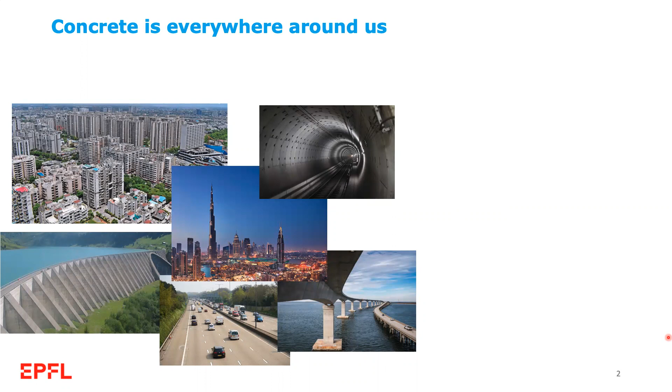Concrete is everywhere around us. We use it to build our houses and infrastructure, in dams to obtain energy, but it's also part of our sustainable development strategies. We will continue to require massive amounts of concrete to materialize these new technologies.

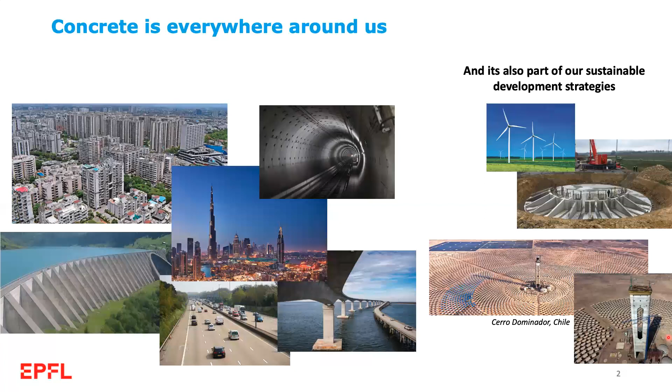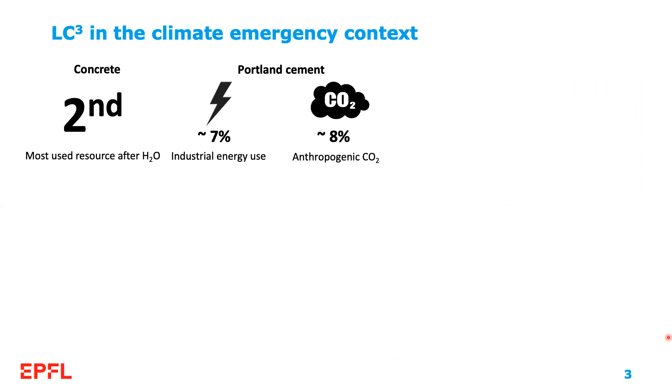Concrete is therefore the second most used resource after water by humanity. The Portland cement that we need to make this concrete is accountable for about 7% of industrial energy use and about 8% of anthropogenic CO2 emissions.

The best estimates we have only forecast that this demand for cement will continue to increase in the next two decades, particularly in regions facing development such as India, Africa, and Latin America.

LC3 is a blended cement that combines clinker, calcined clay, limestone, and gypsum. It allows us to reduce the clinker factor of this blended cement to 50%, saving 30 to 40% CO2 compared to PC, and offering equivalent performance to PC in terms of strength and enhanced durability in some exposure conditions.

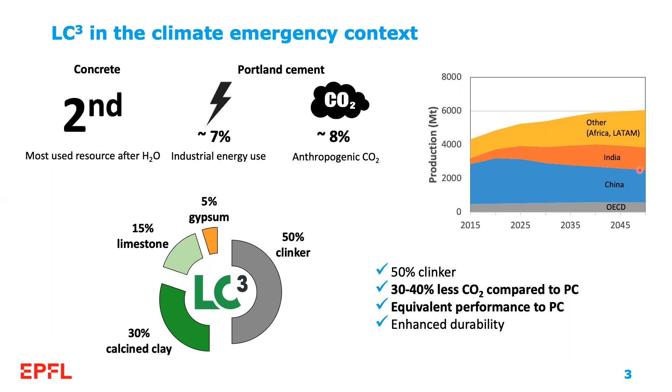Why is it important to consider calcined clay and limestone as supplementary cementitious material? The main reason is that these materials are the only ones available in the quantities we need for a widespread reduction of the clinker factor.

Particularly here, I want to analyze the case of slag and fly ash, which are two materials widely used to blend cements. In the case of slag, the stock that we have worldwide is about 8% of cement production, and it's actually decreasing as we recycle more steel rather than producing from iron ore.

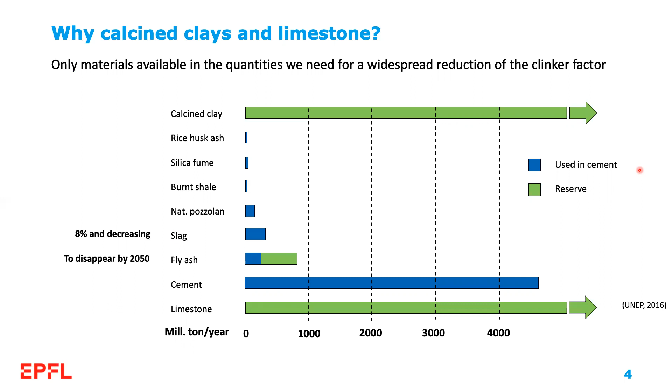And in the case of fly ash, as we shut down our coal power plants, it's expected that this material will disappear by 2050.

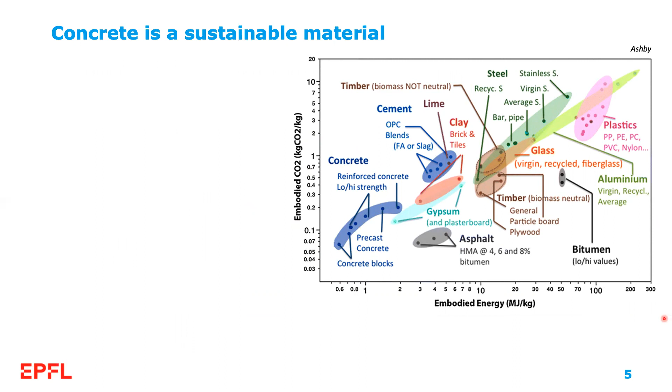Concrete is a sustainable material. When we compare concrete with other construction materials, we can actually see that the embodied energy and the embodied CO2 is much lower. So then where is this high environmental footprint coming from?

It's because we use a lot of it, and we will continue to need a lot of concrete to continue developing our society. Despite the relative low environmental impact of concrete compared to other materials, we still have significant space for improving, and this is what I want to show in this presentation.

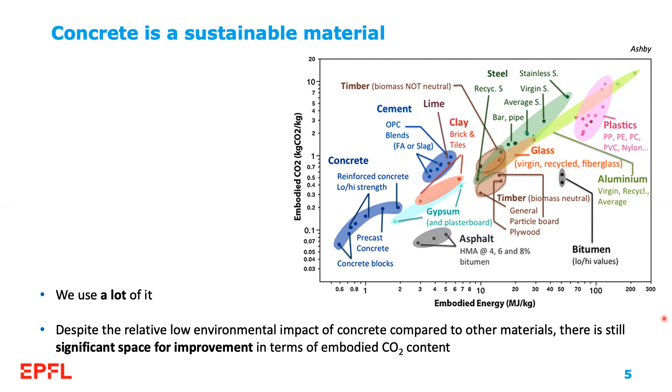What are the strategies that we can focus our scientific and practical development on in order to achieve a lower CO2 material for our future development?

The CO2 of concrete is coming mainly from the cement that is used as a binder to connect the aggregates in the material. Approximately 850 kilograms of CO2 are produced per ton of clinker that are emitted.

In this sense, the best strategy, and this is the focus of most research on sustainable Portland cement in the last decades, is to reduce the amount of clinker by incorporating what we call SCMs, or supplementary cementitious material. In short, we need to use blended cements.

But, and I want to be very clear, the construction material is concrete, not cement. And it's very important here that at the end of the day, we need to think in terms of total binder content, which is cement plus SCMs per cubic meter of concrete.

This is a multi-factor problem because this quantity depends on a lot of other requirements such as slump, maximum aggregate size, the aggregate grading used, the choice of water to cementitious material ratio depending on strength and durability requirements, and the use or not of chemical admixtures. So at the end of the day, this is a multi-factor problem.

And in this regard, the performance of our blended cements is key, as I will illustrate in the next slides of the presentation.

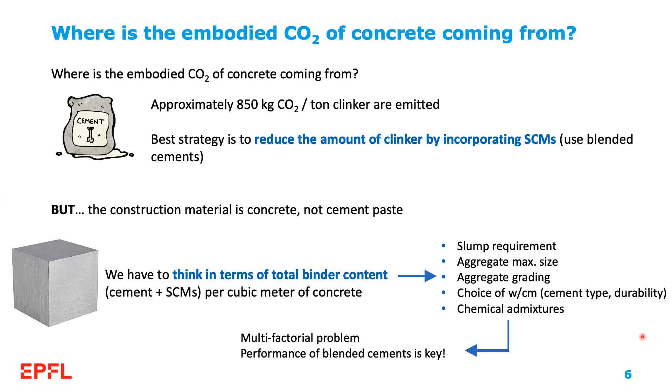LC3 is a good cement for the future. It offers equivalent performance to Portland cement. And this is very important because in this case, we do not need to decrease the water to cementitious materials ratio compared to PC in order to obtain a certain strength in our concrete.

This allows me to keep the binder content per cubic meter of concrete low, or as low as I would use in a Portland cement scenario. This allows me to save 40% of CO2 compared to PC, and I have enhanced durability properties against chloride, sulfate attack, and ASR.

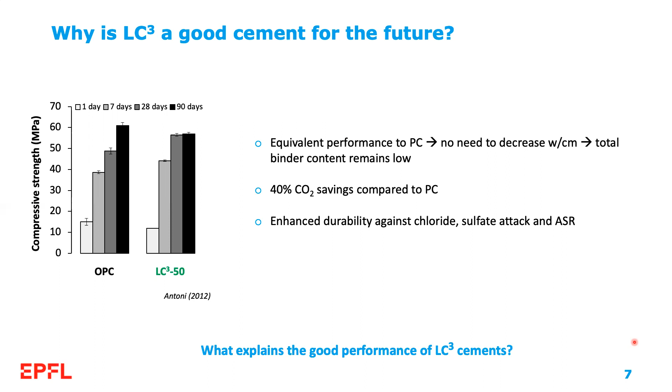What explains the good performance of LC3 cements? What makes LC3 so special that I can reduce the clinker content 50% and still retain the same properties as PC in terms of strength, and even improve some of these properties in terms of durability?

During my doctoral process, I explored different aspects of LC3 technology, from the clay quarry to production of the blend and characterization of its properties at early and long-term ages. In particular, I conducted studies on the effect of calcite and pyrite impurities on the reactivity of the calcined clay, the use of particle classification techniques during grinding to increase the kaolinite content of low-grade clays, the application of grinding aids, particularly alkanolamines on LC3, in order to improve the grinding process and develop strength over time by interaction with the aluminate phases. The sulfate balance of blended cements, and particularly LC3, is something that I study in detail and that I will talk about in depth during this presentation.

What makes LC3 so special is the precipitation of carboaluminates by the interaction between limestone and calcined clay. And finally, the long-term behavior of LC3, and how these reactions continue over time to provide consistent strength and durability of the material.

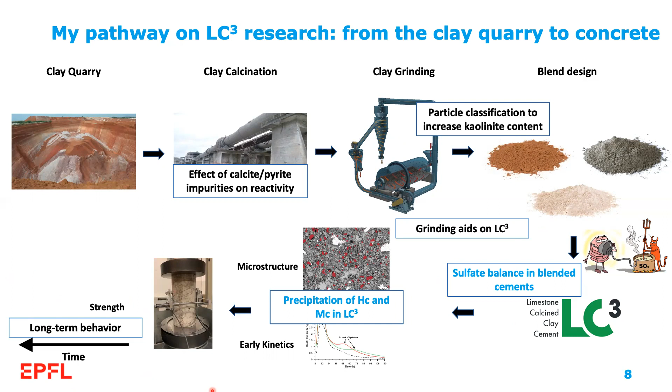We need to understand that the hydration process of a cement is a compilation of chemical reactions taking place one after the other or simultaneously, and these hydration reactions translate into microstructural densification, what we call space filling. It's really this space filling, this microstructural densification, that provides strength and durability.

In this presentation, I will focus my attention on the second hydration peak linked to ettringite precipitation and the third hydration peak, which is associated with the precipitation of carboaluminates.

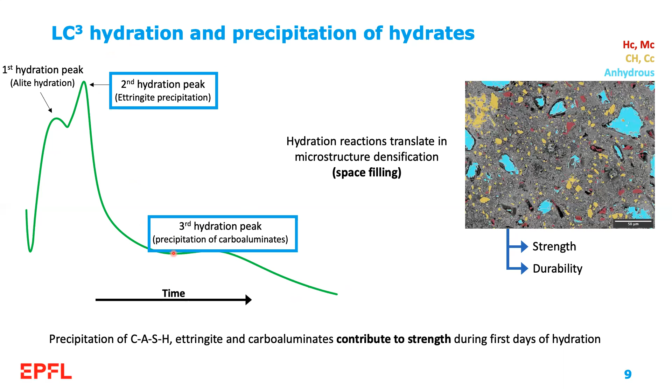I want to move now to talk a little bit more on the work that we have done at EPFL on sulfate balance and carboaluminate precipitation of LC3 cement, and how important it is to understand the underlying mechanisms to optimize the performance of these blended cements.

Fortunately, there is an easy solution for this, and we have known this for more than 100 years. We can add gypsum or another sulfate source to the system in order to retard this aluminate reaction. In this case, the silicate or alite peak takes place first, and the aluminate peak follows. The silicate peak recovers its normal development, and the aluminate peak takes place after depletion of solid gypsum in the system, in what we call a properly sulfated system.

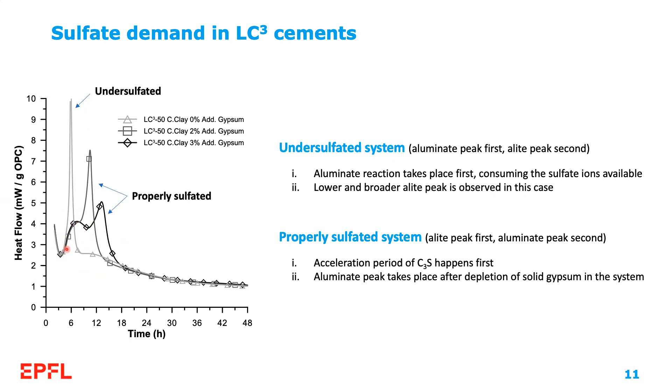But why does LC3 have a higher sulfate demand compared to PC? Why do we need to add more gypsum to LC3 compared to a normal PC, even accounting for the dilution effect of the clinker factor reduction? For a long time, we believed that it was the alumina introduced by the addition of metakaolin, an amorphous aluminosilicate, into the system.

The difference between the two clays is that the lowest grade clay, meaning lower metakaolin content, has a higher specific surface area compared to the higher metakaolin content system. We can see that by the increased enhancement of the alite peak in the case of the 50% metakaolin system.

So it appears that the acceleration of the aluminate reaction is more related to the filler effect contribution of the calcined clay rather than the alumina contribution of the material.

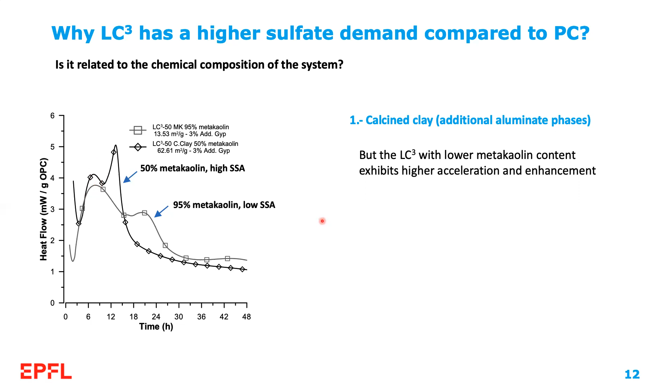So in this case, we were able to confirm that the contribution of the surface of the SCMs, through what we call the filler effect, explains the higher sulfate demand or increased sulfate demand of LC3 and in general of any blended cement. But the question is then how the filler effect is linked to gypsum depletion, because filler effect is something we normally relate to alite reaction enhancement, and this is a separate chemical reaction involving alumina.

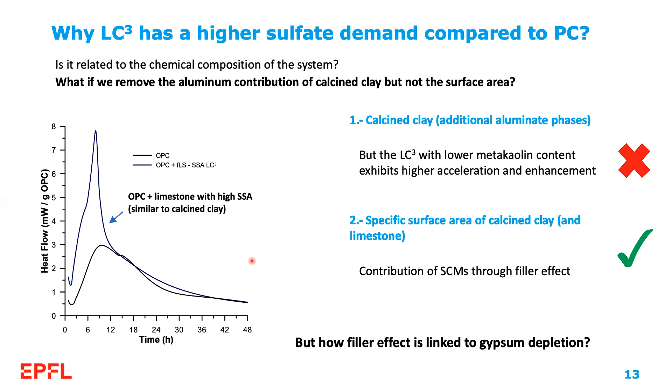And the answer to that is CSH. CSH, as we know, is the main reaction product of the hydration of cement, and it's well known that it can adsorb and incorporate different ions during the hydration process, particularly sulfate, as we are concerned here, but it can also incorporate things such as alumina, alkalis, and chloride.

We can see here from previous work in our lab that the amount of sulfate in the CSH is very high before the aluminate peak, and then it decreases as the aluminate reaction restarts after depletion of solid gypsum in the system. So basically what this shows us is that sulfate is adsorbed on CSH and then is desorbed at gypsum depletion.

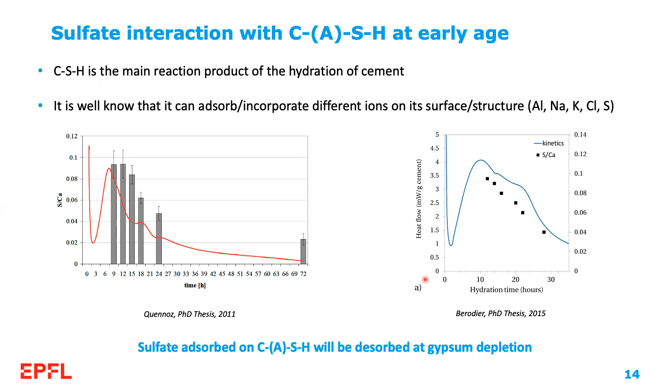This allows us to formulate our mechanism of sulfate balance of LC3 and in general of any cementitious material. We can divide this in two stages. During the first stage, sulfate gets adsorbed in CSH surface.

And it's very important here to realize that if the rate of CSH precipitation is increased, sulfate adsorption will also increase. In this regard, finer material, such as finer clinker, for example, hydrates quicker, consuming more sulfate per unit time. So this cement will have higher sulfate demand.

And the addition of more nucleation surface, what we call fillers, which is basically what supplementary cementitious materials are doing, will affect the CSH precipitation rate and therefore the sulfate balance. But this contribution is in general independent of the chemical composition, as long as the chemical composition is not significantly affecting the filler capacity of the material. In particular, this is not directly related to the alumina content of my material.

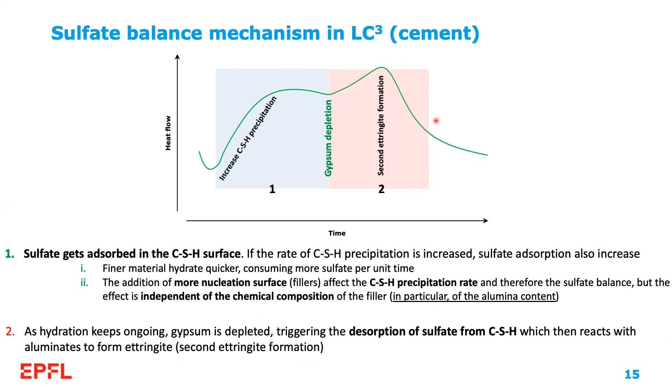In the second stage, as hydration keeps going, gypsum is depleted from the system, triggering the desorption of sulfate from CSH, which then reacts with the aluminates to form ettringite during the second ettringite formation, which we associate with our aluminate peak.

Let's move now to precipitation of carboaluminates in LC3, and why this enhanced formation of carboaluminate is so special, and makes LC3 such a special blended cement for our sustainable concrete endeavor.

So summarizing what we know now, we have three main peaks that we can clearly identify during LC3 early hydration. A first alite peak associated with dissolution of C3S, leading to precipitation of CSH. A second aluminate peak associated with the fast dissolution of C3A, leading to the second precipitation of ettringite, as we discussed in the previous slide.

And we have this third peak of hydration. We wanted to understand which reaction was associated with this third peak of hydration, which appears enhanced in LC3 compared to what we see in Portland cement. For this, we analyzed the different reactions happening in LC3 that involve metakaolin.

So the first one that we see here is the classical pozzolanic reaction, if you want, where metakaolin reacts with portlandite and water to form CASH. In addition, it's well known that limestone or calcium carbonate can react with alumina from clinker.

With the alumina from C3A mainly, to form what we call carboaluminates, monocarboaluminate and hemicarboaluminate. And in LC3, we have a third reaction, which we call the synergetic reaction, where the aluminates from calcined clay replace the alumina from clinker, because we have another source of amorphous alumina here, very reactive, and can react with the calcium carbonate and portlandite in order to form more carboaluminates than what we would observe in the case of a cement not incorporating calcined clay.

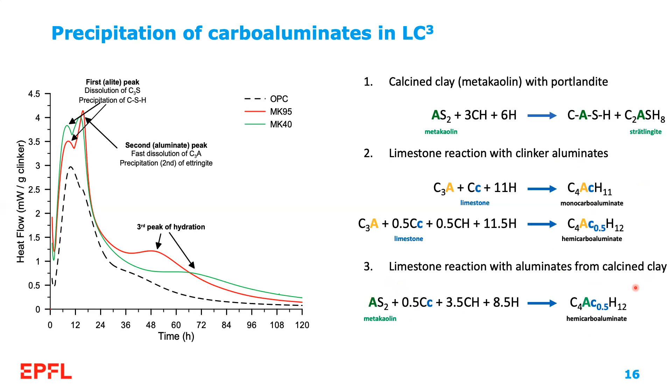By systematic exploration of these different reactions, and by doing selective experiments to try to decouple these different effects, we were able to associate this third peak of hydration with this reaction here, what we call the synergetic reaction between metakaolin and limestone.

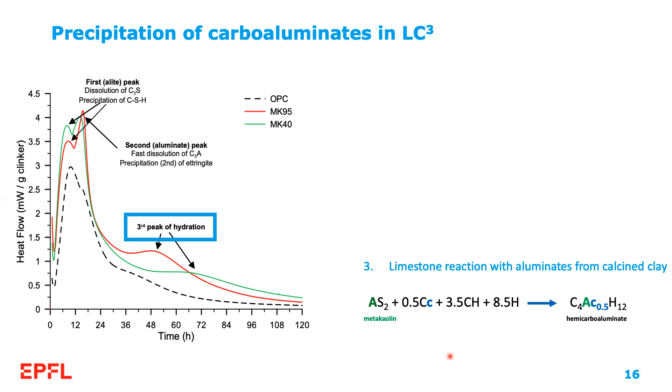Carboaluminates precipitate in the microstructure of LC3 in grains, filling large pores that are left behind by clinker hydration. This is really important because AFm phases, and in particular in this case carboaluminates, contribute significantly to porosity reduction at early ages.

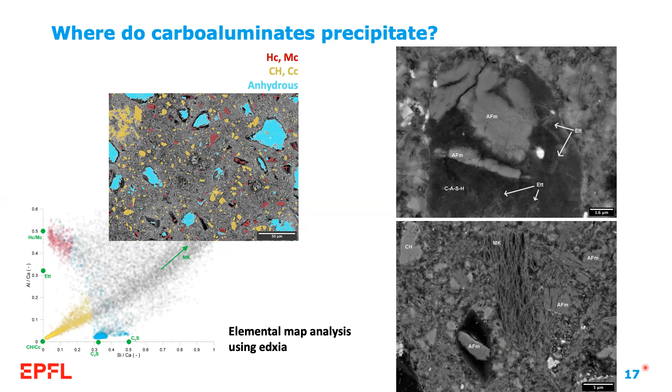We were able to confirm the contribution of carboaluminates to mechanical properties by using in situ ultrasound pulse velocity measurements. To do this, we used two systems that have a consistently different third peak of hydration, which we now know is associated with the formation of carboaluminates. We performed this measurement, which basically provides an estimation of the development of mechanical properties over time.

Where we see the highest correlation between metakaolin content and compressive strength of our LC3. We can also conclude that if we can increase the amount of hemi and monocarboaluminates, we can likely increase the strength properties of our LC3 as well, for example by using alkanolamines as grinding aids.

This is a side study that we did during my doctoral process. We could confirm that by using things such as TEA, triethanolamine, in the calcined clay, we can not only improve the grindability properties of the material, but also enhance the strength development of the material by promoting the formation of hemi and monocarboaluminate.

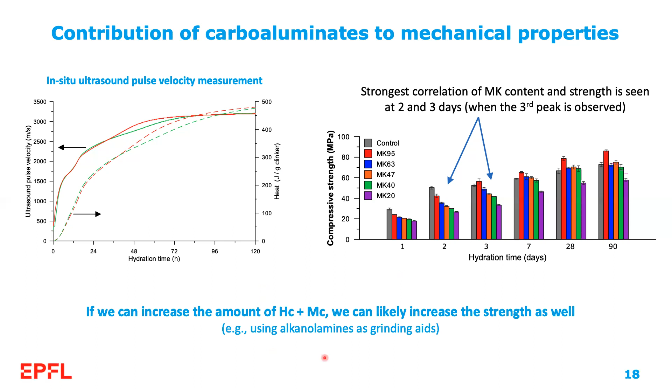In the beginning, the higher the amount of metakaolin in my LC3, the higher the amount of hemi and monocarboaluminate that I form. But as early as 7 days, we have a reversal of this trend, and we observe lower amounts of carboaluminates in the higher grade systems, while the higher amounts are actually observed in the medium grade ones.

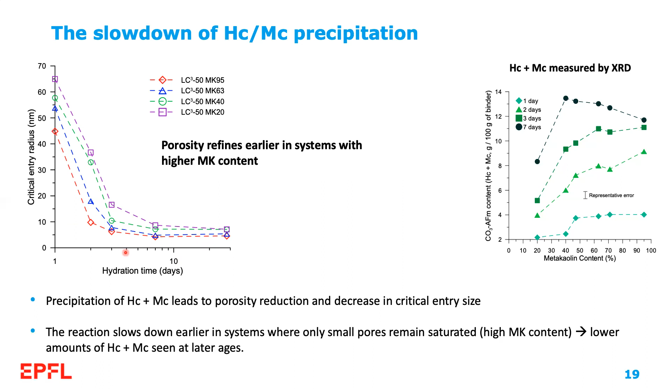We can see here that the 95% system becomes refined as early as 2 or 3 days, while the system with 20% metakaolin takes about 7 days to reach the same degree of refinement. The reaction then slows down earlier in systems where only small pores remain saturated, in this case in systems with higher metakaolin content, and this is why we observe lower amounts of carboaluminates at later ages.

However, I want to emphasize that the reaction is slowing down, but it's not stopping. Slow precipitation still occurs at later ages, as we can see here in the plot, where we compare the amounts of AFM, hemicarboaluminate, monocarboaluminate, and stratlingite between 90 days and 3 years. We can see that in all of the systems studied, the amount of AFM increases over time, so it continues to precipitate, but at a much slower rate in the long term.

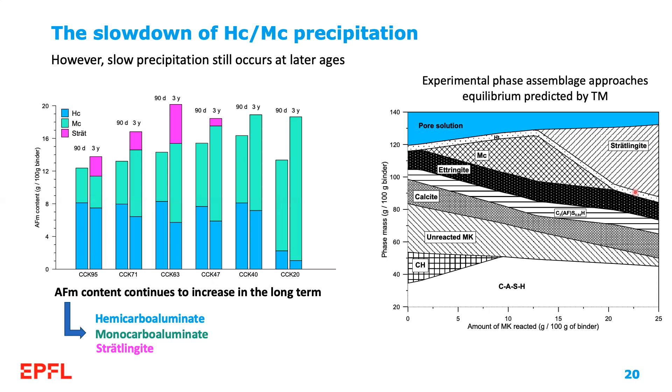In addition to hemi and monocarboaluminate, we also observe stratlingite, which is the third type of AFM phase. In this case, we can also observe that the experimental phase assemblage starts to approach more what we compute by thermodynamic modeling, in two ways: we observe stratlingite in our high-grade systems with metakaolin contents above 47%, and the proportion of hemi and monocarboaluminate increases towards monocarboaluminate, which is also something predicted by thermodynamic modeling.

In terms of precipitation, by coupling MIP measurements with internal relative humidity measurements, we were able to propose a dual mechanism for hydrate precipitation in the long term. By using the internal relative humidity measurement, we are able to compute the largest pore size that remains saturated with pore solution, while all of the rest of the porosity remains partially saturated or only covered with a film that lines the internal surface of the pores.

The largest porosity reduction is indeed observed in the saturated portion compared to the slight reduction that we observe in the fraction that remains partially saturated. But it's important to mention that we still see some reduction in this area.

In this case, we propose that there is a dual mechanism. In small pores that remain saturated, we have conventional precipitation of hydrates because we have pore solution saturating the pores. And in pores that are larger than that, so they are only partially saturated or covered by a film lining the internal surface of the pore, we have slow precipitation in this solution film that covers the surface of the pore.

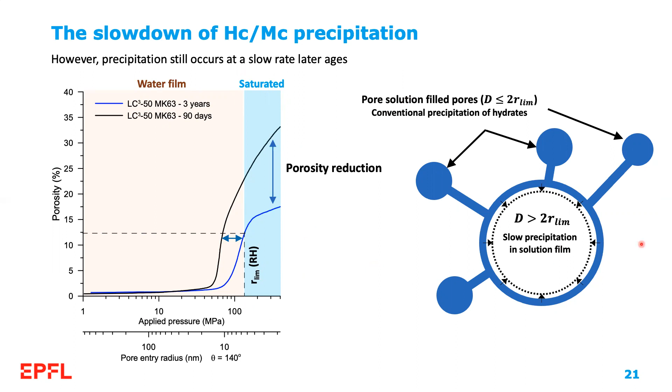Finally, to close my presentation, I would like to offer an outlook and some perspective of the LC3 technology, and some thoughts on how we can increase the CO2 saving potential of this technology and of the concrete industry in general.

Personally, I consider that the golden rule is that we need to develop and use blended cements with the least amount of embodied CO2, which in most cases is proportional to the lowest amount of clinker, but very importantly, that have sufficient performance to enable their use without a significant increase of binder content per cubic meter.

And this is what I call the twofold strategy. We need to consider the two scales simultaneously, because otherwise we will not achieve the optimum CO2 reduction per cubic meter of concrete. We need to consider simultaneously the CO2 of cement, which is proportional to, or the same as saying, we need to reduce the clinker and retain, or improve, the performance we can.

And we need to, at the end of the day, reduce the CO2 of concrete. So we need to reduce the paste content while remaining still workable, strong, and durable. And this is very related to the development of more advanced admixtures that enable us to do this in a more efficient way in the future.

This is where LC3 technology becomes a breakthrough, because it's, to my knowledge, one of the few solutions, if not the only one, that enables a substantial clinker reduction while retaining the same mechanical performance as PC. And this is very important because it links very efficiently the two components of the twofold strategy.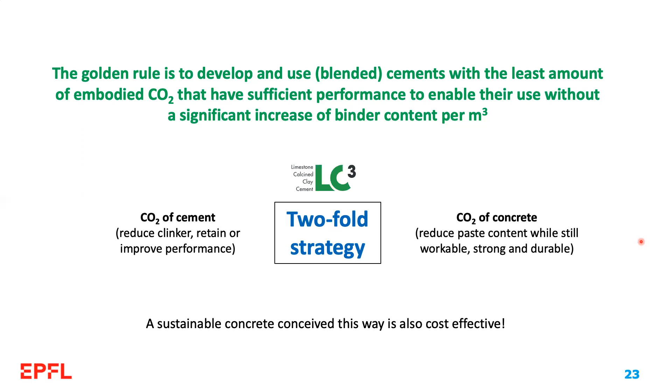Also, a sustainable concrete conceived in this way is most of the time cost effective, because we are reducing in these two elements of the twofold strategy the amount of cement, which is the most expensive component of concrete.

To illustrate the CO2 saving potential of the clinker factor reduction and the binder content reduction, I would like to show this animated illustration that I prepared here.

So I took a typical cement from the European market, a Portland limestone cement with 85% clinker, 10% limestone, 5% gypsum, and I assigned to that 100 units of CO2 per cubic meter of concrete at a binder content of 375 kilograms per cubic meter, which is also a typical number or combination used in the Swiss market.

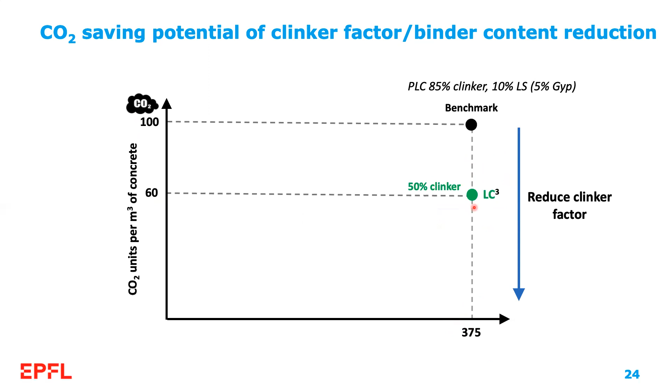If we analyze the clinker reduction element and take something like LC3, which enables us to go 50% clinker down, we move to here. We know that LC3 enables us to save 40% of CO2 compared to PC. And even by not doing anything at the concrete design scale, we can save 40% of CO2. This is so important, because since LC3 retains the performance of PC, we can do this without having to modify our water to cement ratio.

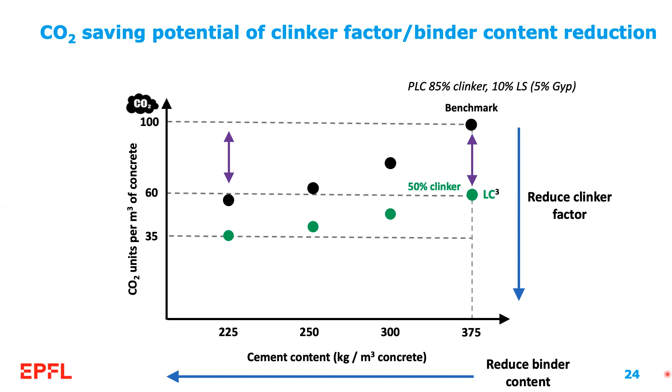If we then start working on our concrete mixture design and reduce the binder content, we can see that we can also significantly reduce the CO2 units per cubic meter of concrete. Of course, doing the two things at the same time leads to the best reduction in CO2 per cubic meter of concrete. But I want to emphasize here that the two strategies, reducing the clinker factor and reducing the binder content per cubic meter of concrete, have similar potential to reduce the CO2 of our construction material at the end. So we really need to tackle both in order to have the best results.

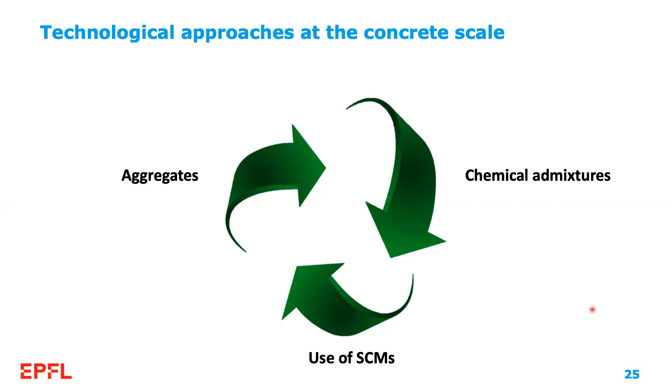In this regard, at the concrete scale, I would like to address three elements that I consider very important in order to achieve low CO2 concrete mixtures. These cover aggregate selection and aggregate grading, the use of chemical admixtures, and of course, what we have been discussing during the whole webinar, the use of SCMs.

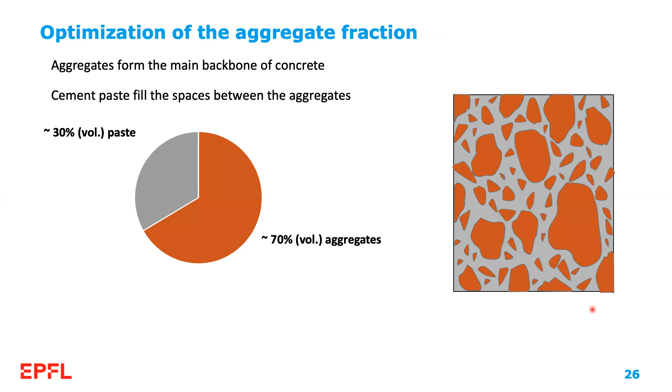In terms of aggregates, we need to realize that aggregates constitute about 70% by volume of our concrete. So our concrete, volumetrically speaking, is mostly aggregates, and the cement paste basically fills the spaces between these aggregates. We need the cement paste to coat the surface of the aggregates, because it acts as a lubricant between them, and this is what enables flow at the fresh state of concrete.

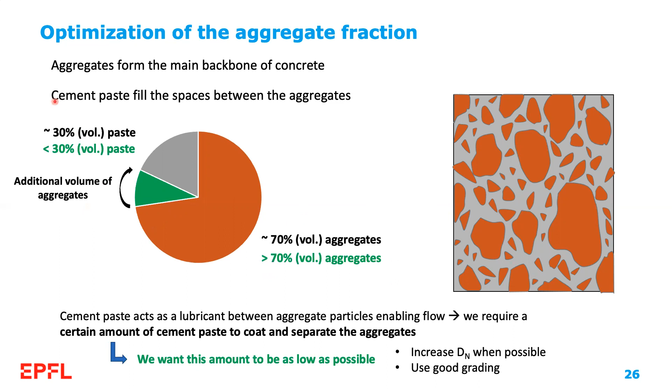So we need a certain amount of paste, but we want this amount to be as low as possible. There are basically two things at the aggregate scale that we can do to achieve this. We can increase the maximum aggregate size when possible, using the largest aggregate sizes we can, and designing our structure to enable this if possible. We also need to use good grading of aggregates. In an ideal situation, we'd like a concrete with more than 70% aggregates and less than 30% volume of cement paste.

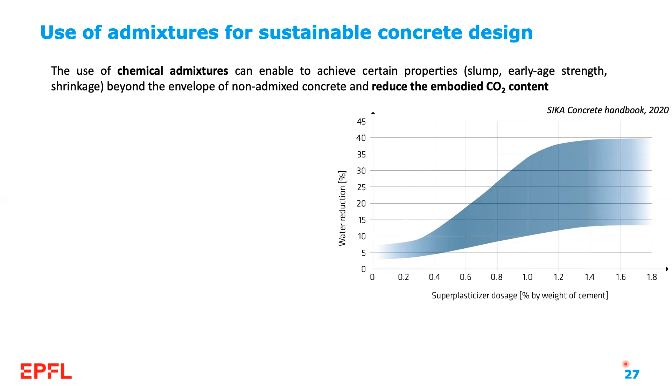Chemical admixtures can enable us to achieve certain properties such as slump, early age strength, and shrinkage beyond the envelope of non-admixed concrete, and reduce the amount of embodied CO2. I'd like to illustrate this with an example using a superplasticizer. If we take a typical concrete with a water demand for slump of 200 kilograms per cubic meter, and formulate this concrete with no superplasticizer versus 1% superplasticizer addition that enables a 25% reduction in water content, we can compute the amounts of cement and superplasticizer needed. Using reference numbers for CO2 calculations, we can see that the use of superplasticizer enables us to cut 23% of the CO2 per cubic meter of concrete just by applying this strategy alone.

Other types of admixtures, such as accelerators, air entrainers, etc., can also enable us to achieve other properties of interest in our concrete. So it's very important to consider the use of admixtures as a way to reduce the carbon in our concrete designs.

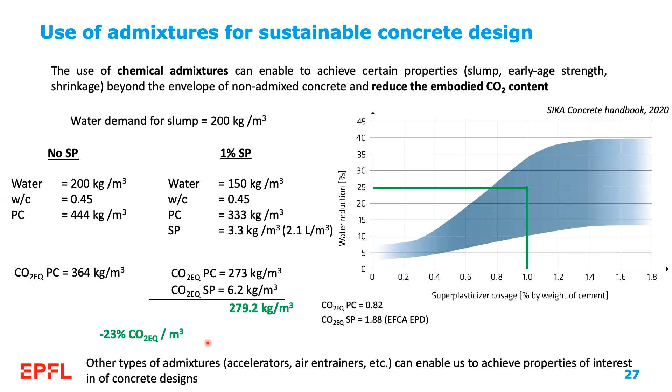Reducing the clinker factor with poorly reactive SCMs can lead to a situation where the binder content per cubic meter of concrete has to increase to achieve a certain strength. This is basically reducing the water to cement ratio, and since we have a water demand for slump, we will have to increase the amount of cementitious materials, and we can end up actually with a concrete that has a higher embodied CO2 content compared to our base scenario.

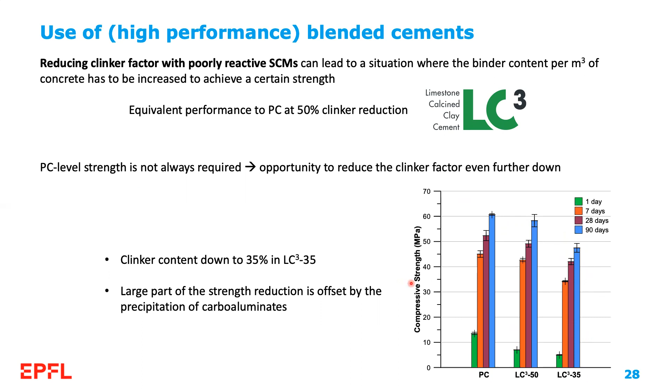This is why LC3 is so special, because it offers equivalent performance to PC at 50% clinker reduction. But PC level strength is not always required, and this is an opportunity to reduce the clinker factor even further down. We did trials with what we call LC3-35 with 35% clinker, where we don't achieve the same strength level of PC as we do with LC3-50, but we still achieve something above 40 megapascals at 28 days. A large part of the strength reduction is offset by the precipitation of carboaluminates in the system.

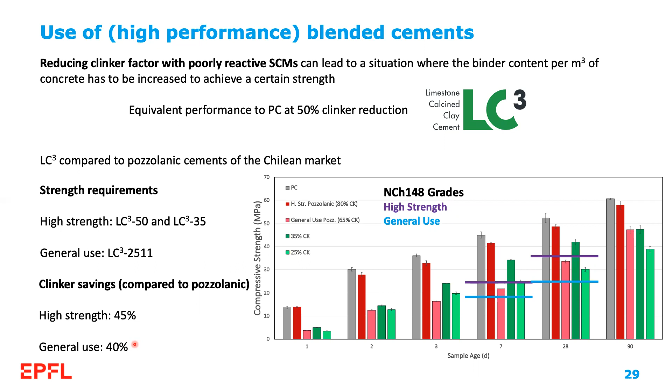If we then compare LC3 to pozzolanic cements of the Chilean market, both the high strength and general use grades with 80 and 65% clinker, we can see that we can achieve the strength requirements of this standard with 35% clinker and 25% clinker using something like LC3. So we meet the high strength requirement of the Chilean standard with LC3-50 or LC3-35, and the general use one with LC3-25 - there's a small typo there. This leads us to clinker savings compared to pozzolanic cements of 45% in the high strength grade and 40% in the general use one. So a huge opportunity to develop lower CO2 cement, even in markets where PC level strength is not required or not implemented in the standards.

As final remarks, I would like to highlight that LC3 is a good cement for the future. First, because the raw materials are widely available, and also, very importantly, because it offers comparable performance to PC. Understanding the fundamental mechanisms of sulfate balance and carboaluminate precipitation are key elements to optimize and formulate better LC3 cements.

This twofold strategy that I mentioned enables the consideration of other factors in the concrete mixture design towards low CO2 formulations. The strategy highlights the importance of performance in blended cements. There are additional opportunities at the concrete design scale - I mentioned three of them: use of admixtures, aggregate design, and the use of high performance SCMs. In addition, we can use formulations of LC3 with lower clinker contents below 50% in lower strength applications.

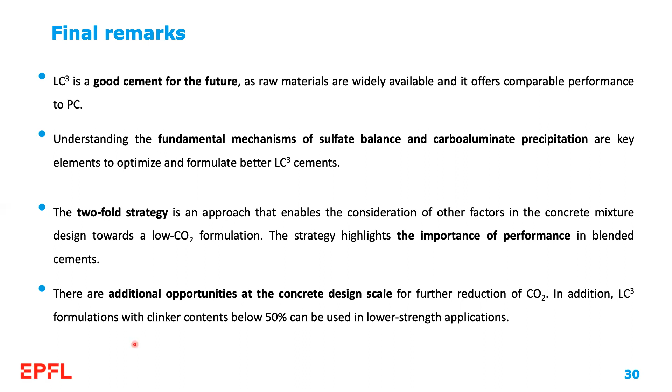With this, I would like to thank you for your attention.